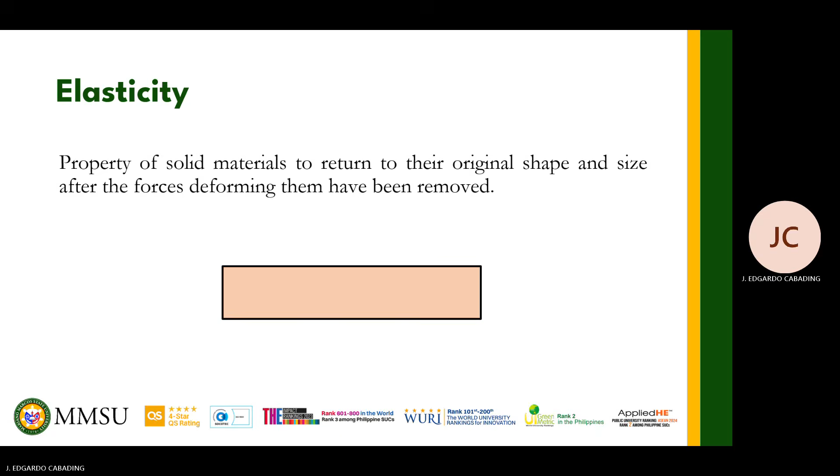Ngayon, discuss naman natin etong si Hooke's Law. So etong Hooke's Law, nanggaling siya kay Robert Hooke and from the experiments he conducted during his time. So si Robert Hooke dati, nagsuspend siya ng mga springs, wires and rods. So parang ganito yung ginawa niya. Then nag-attach siya ng mga weights sa lower end, so dito.

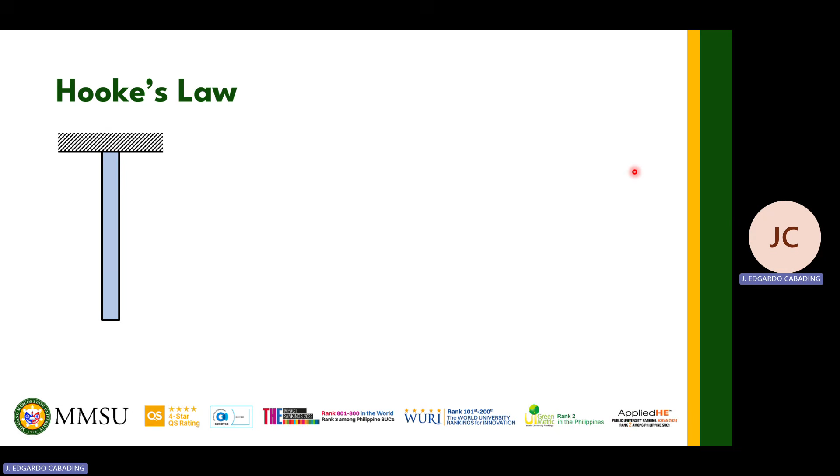So kumbaga merong hila dito galing sa weights. In our case, sabihin na lang natin that that is an applied force F. So madaming beses niyang ginawa yan. Tapos iba-iba yung weights na nilalagay niya. So side quest lang tayo ng onti. Balikan natin yung static equilibrium natin.

Since suspended to sa taas, ibig sabihin, hindi ito gagalaw. So there should be a force resisting this applied force para masabi natin that this is at static equilibrium. And yung force na yon is etong reaction natin dito sa taas, which we are denoting here as R. And R is simply the negative of the applied force F.

Okay? So going back, since at equilibrium siya, at kumbaga parang hinihila natin yan sa magkabilang dulo, then tulad nung pinakita ko kanina sa elasticity, the object itself will elongate or deform. So ito yung deformation natin, and let us denote this as our delta L. And this is exactly what Robert Hooke was observing sa mga experiments na kinonduct niya.

So tinatanong niya dati, ano ba yung i-elongate or i-deform ng object at different attached weights? So ayun nga, ginawa niya ng madaming beses with different weights. And Robert Hooke found out that the applied force F is directly proportional to our elongation. So if we create an equality from this, ito yung magiging equation natin. So magkakaroon tayo dito ng constant of proportionality K, which is our stiffness coefficient.

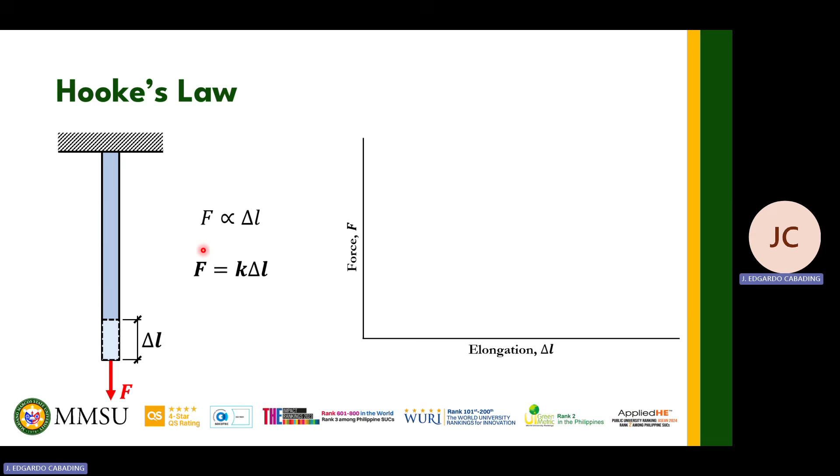Now, let us try to look at this force elongation graph para ma-discuss natin to further. So initially, guys, materials behave elastically. So this equation applies. So di ba linear equation to? Therefore, yung curve natin dito is linear. So ayan siya.

But then again, hindi naman yan tutuloy as linear all throughout. Kasi nga, sabi ko, there is only a limit to an object's elasticity. So, as I said, applicable lang si Hooke's law up to a certain point, and that point is the proportional limit. After nyan, mag-iiba na yung curve natin. So, magiging ganyan siya. And eventually, mapuputol yung curve natin, kasi yung object natin, mafa-fracture na siya or mabe-break. And ang tawag naman natin dyan is the breaking point.

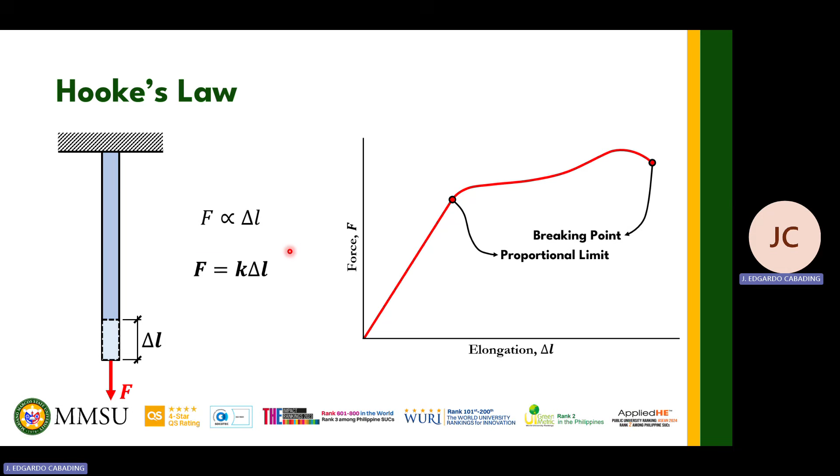So, there is also a point after the proportional limit called the elastic limit. Ito naman yung limit ng pagiging elastic ng object natin. So, at this magnitude of force, pwede pa ding bumalik sa dating shape yung object. And note lang guys, the elastic limit is not necessarily within the linear curve. So, ito yung minention natin kanina na nagde-define sa elasticity ng isang object.

So, etong region, tinatawag nating elastic region. Within this magnitude of force and amount of elongation, the object still behaves elastically, babalik pa din sa dati yung object natin. After nyan, the object behaves plastically. Meaning, once na nandyan na siya, permanent na yung deformation or elongation natin. Hindi na siya babalik sa dati niyang shape. So, this is called the plastic region.

And then, at the peak of our curve, we have here our ultimate strength. Ayan na yung pinakamataas na force na kayang buhatin ng object bago siya pumalya. Kasi after nyan, hihina na siya and then eventually magfa-fracture or magbe-break.

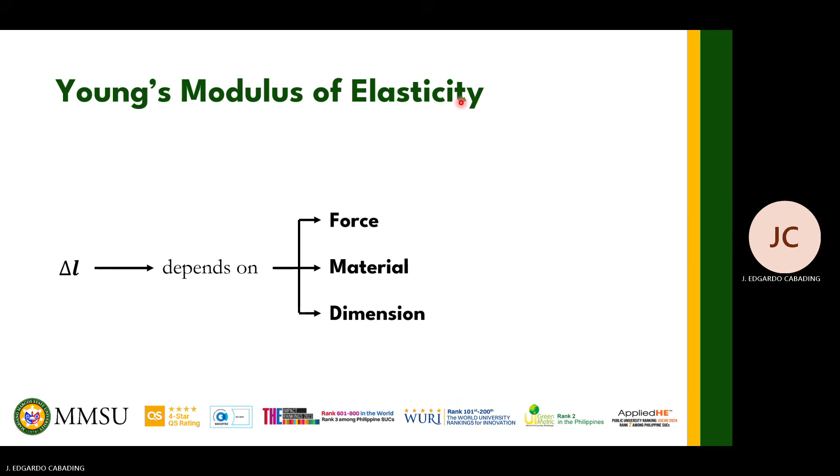Okay? O ngayon, pag-usapan naman natin yung Young's modulus of elasticity. Our elongation or deformation actually depends on the force applied, the material the object is made up of, and yung dimension ng object. So, going back to Hooke's law, guys, pag nire-write natin siya in such a way that we can make an equation for the elongation, magiging ganito siya. Now, we want to write this equation in terms of the factors na pinakita natin: yung force, dimension, tsaka yung material. And it will be like this.

So, F here is our force. Our E right here defines the material the object is made up of. And etong A naman is the cross-sectional area. And etong L0, which is the original length of the object, is the dimension na tinutukoy natin. And so, we can say, guys, that our stiffness coefficient K is simply AE over L0.

So, our E right here is the Young's modulus of elasticity. Ito yung nagde-define sa elasticity ng isang object. And etong E depends on the material. Pag mas malaki yung E, mas stiff yung object. Meaning, mas mahirap siyang i-deform or i-elongate. Okay?

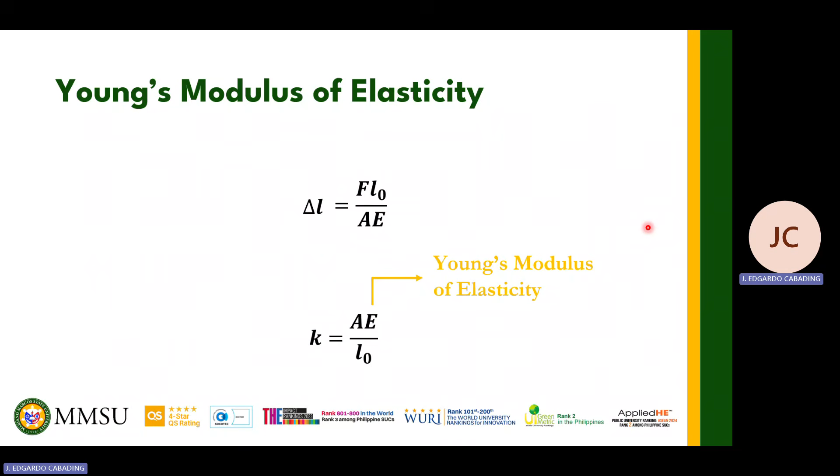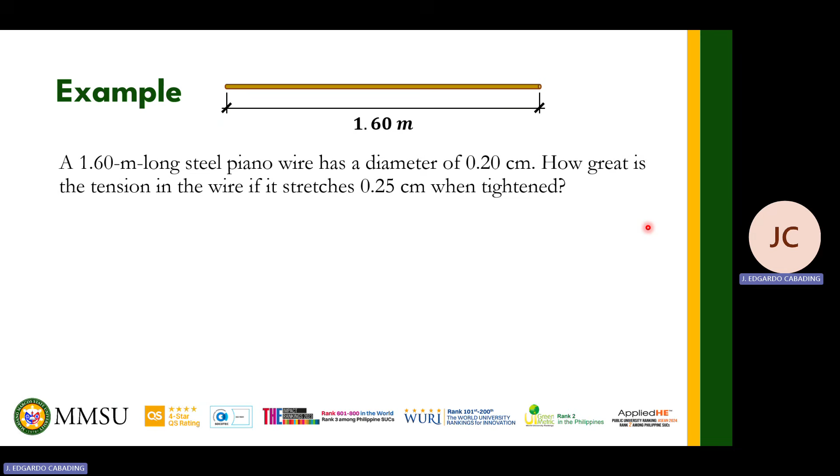So, answer tayo ng isang example lang, para magamit naman natin yung mga equations na pinagdi-discuss natin. A 1.60 meter long steel piano wire has a diameter of 0.20 centimeters. How great is the tension in the wire if it stretches 0.25 centimeters when tightened? So this is our long steel piano wire which has an original length of 1.60 meters. Tapos hahaba daw yan by 0.25 centimeters pag hinila. So dito guys, we will be solving for the tension force, yung magnitude ng hila natin.

To solve this, we will be using this equation. Lapag muna natin lahat ng given. We have here the length, the diameter of the wire, the elongation, and etong modulus of elasticity can be determined based on the material. Since steel daw to, this is always 2 times 10 raised to 11 newtons per square meter. As civil engineering students guys, dapat sinasapuso nyo yung value na yan, kasi madalas na gamitin yan in your higher subjects. So looking at the equation, we pretty much have everything already. Syempre yung F matitira, yung A na lang yung wala.

Pero, we have here the diameter. Okay? Pagka tinignan natin ng malapitan yung wire, eto siya. So, yung cross-section nito is circular. So, the area that we need here is the cross-sectional area. So, etong blue. Since circle yan, guys, kailangan lang natin ng equation for the area of a circle. So, that is pi d squared over 4. Kasi nga, diameter yung given, di ba?

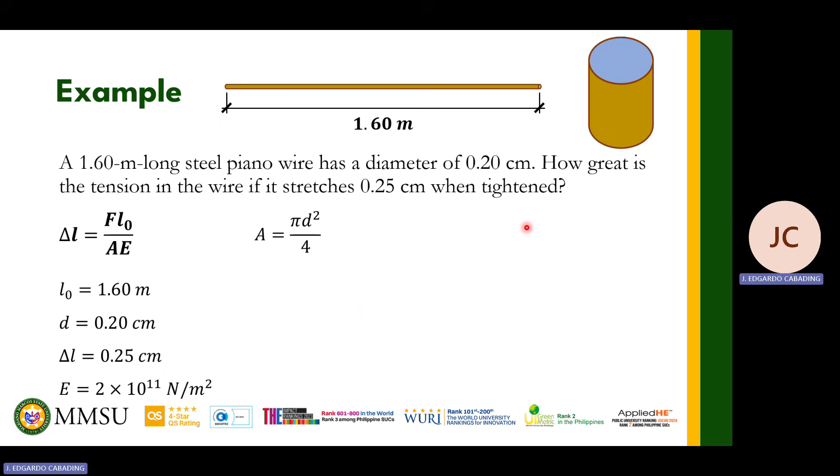And then, substituting values, we will be getting pi times 10 raised to negative 6. So, kompleto na tayo, no? Pwede na tayong mag-substitute ng values sa equation natin for elongation to solve for F. So, ayan, substituting values, F na lang yung natira. So, solving for F, we will get 981.7477 newtons. So, ayan na yung sagot. Okay?

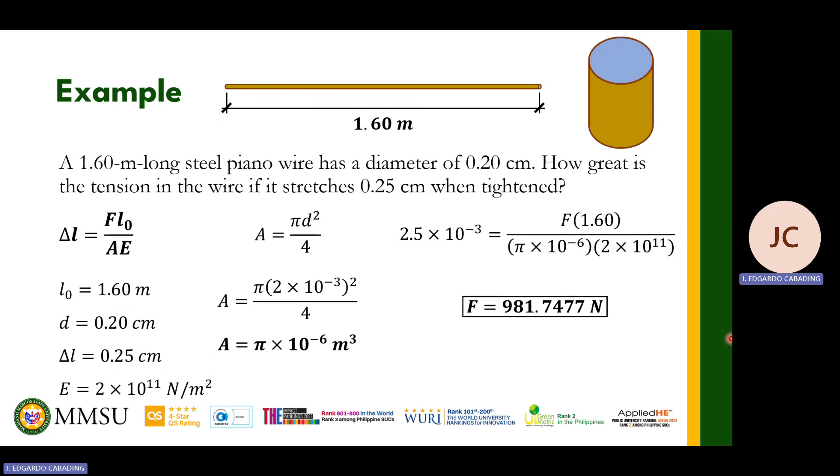Ngayon, discuss naman natin itong stress. So, let's say, meron tayong object as such. And sabihin natin na meron tayong equal external forces at both ends ng object. So, meron tayong hila sa magkabilaang dulo with the same magnitude, meaning at equilibrium tayo. Okay? So, what we want to do is putulin tong object na to, pero hindi literal. So, we just want to make an imaginary cut or section dito para makita lang natin yung loob. Okay? So, doing that, magiging ganito siya.

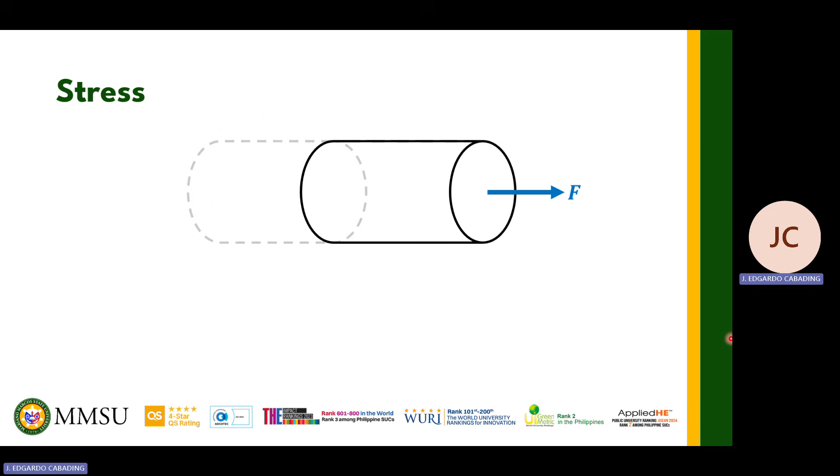Tapos, merong lilitaw dito na internal forces that are counteracting this external force. So, etong F na to, equal lang siya dito. Okay? So, eto, nire-represent lang natin siya as a single arrow. Pwede ding multiple arrows, no? Pero in reality, the internal forces are just distributed all over the entire cross-sectional area. So, it would make more sense to talk about stress dito kesa internal forces. Kasi nga, that is exactly what stress is, no? Yung quantity that describes the distribution of internal forces sa cross-sectional area natin sa loob.

So, the stress is written as force over unit area. So, denoted si stress by sigma. Eto. And the unit for stress in SI units is newtons per square meter. Okay?

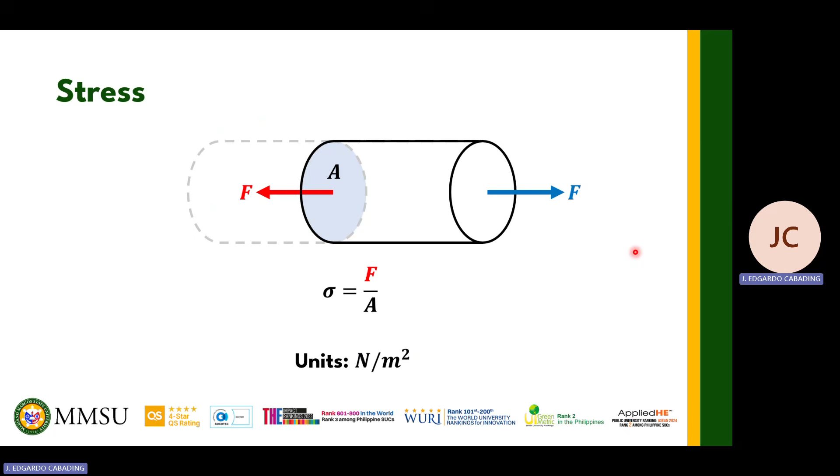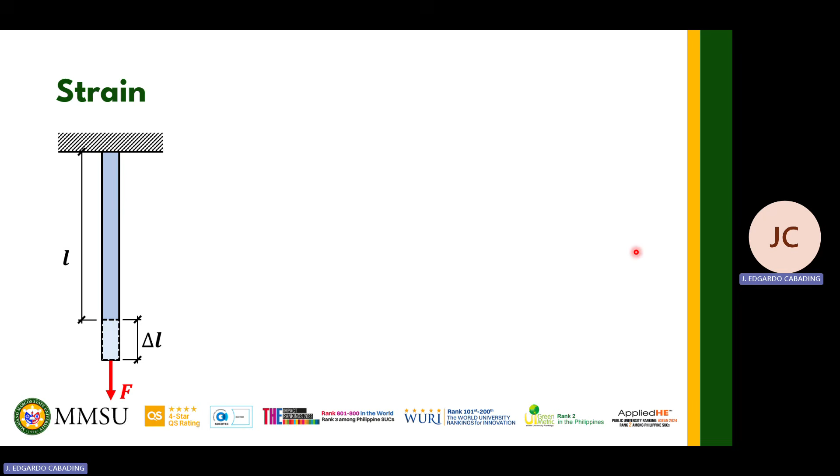So, let us also discuss strain. Kasi ito, magkapatid to si stress tsaka strain. Sa strain naman, guys, balik lang tayo sa isang figure natin kanina. So, we have a suspended object, tas meron tayong hila pababa. So, this will deform. Again, ito yung elongation or deformation natin na delta L. Ito naman yung original length natin. So, yung strain, guys, is just the ratio of the elongation and the original length. So, this tells us how much a material or object deformed compared sa original size niya. So, i-divide lang natin yung dalawang yan para makuha natin yung strain. Okay? So, this will be our equation. So, our strain is denoted by an epsilon.

So, let us also briefly talk about the relationship between the stress and the strain. So, balik lang tayo sa equation natin kanina for elongation or deformation. And then, rewrite lang natin to, no? So, we have here F over A, which is our stress, no? And this is equal to E times delta L over L naught. So, ito naman yung strain natin. Pag pinalitan natin yan, this will be stress sigma equal to E times the strain, which is etong epsilon. So, this is the very famous formula that shows the relationship between the two. Okay? So, the stress, guys, is directly proportional to the strain. Pag tumaas yung stress, tataas yung strain. Ganun lang yon. Okay?

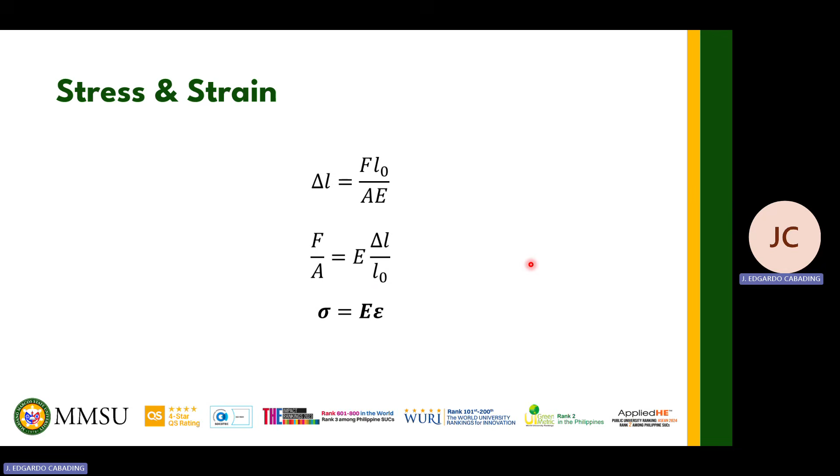So, this ends our discussion for this chapter. And gusto ko lang sabihin, no, na puro hila lang yung diniscuss natin dito, puro elongation lang yung deformation natin. But this is only for the sake of discussion. Actually guys, madami tayong klase ng stress at deformation. Hindi lang limited sa laman ng discussion natin. So, contrary to elongation, meron din tayong shortening pagka yung object is na-compress instead na natitense. Meron din tayong sideways na deformation. Meron din tayong torsional or yung paikot. Okay? But again, this is for the sake of discussion para mas simple lang yung nade-deliver sa inyo, para lang ma-introduce or maipakilala lang natin for the meantime yung mga concepts nito.